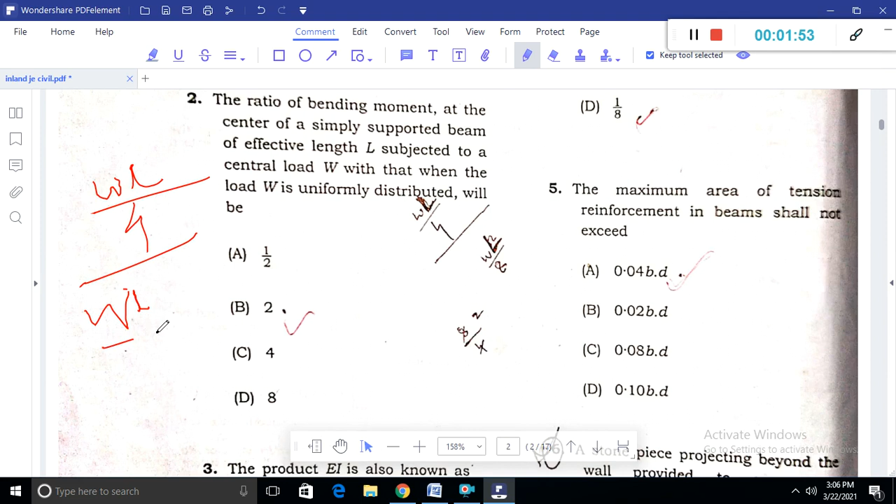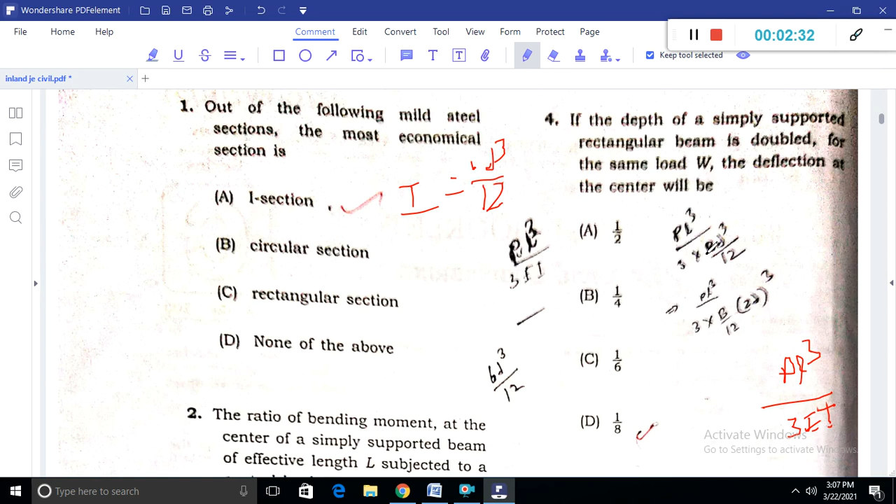If the depth of a simply supported rectangular beam is doubled for the same load, the deflection at the center is given as PL³/3EI. So we know it is inversely proportional to the modulus of elasticity and inversely proportional to the value of I, that is moment of inertia. For a rectangular section, moment of inertia is BD³/12. Here the D value is doubled, so it becomes 2D³, which gives 2³=8. So the final answer will be 1/8.

Next, the maximum area of tension reinforcement in the beam shall not exceed 4% of BD, that is 0.04 BD.

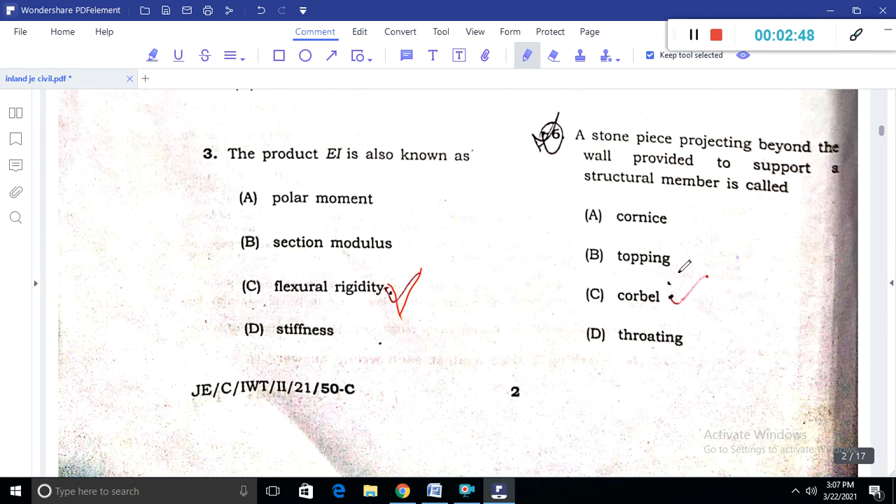A stone piece projecting beyond the wall provided to support a structural member is known as corbel.

Question number 7 asks, according to IS 456/2000, shear reinforcement is dependent on. Remember, shear reinforcement depends on the percentage of tension reinforcement and also on the grade of concrete. So options A and B are correct.

The diameter of longitudinal bars of the column should never be less than 12 mm.

That's an easy question. Next, as per IS 456/2000, the minimum grade of concrete to be used for RCC construction is M20.

Next, the ratio of Young's modulus of elasticity for steel to that of concrete is known as the modular ratio.

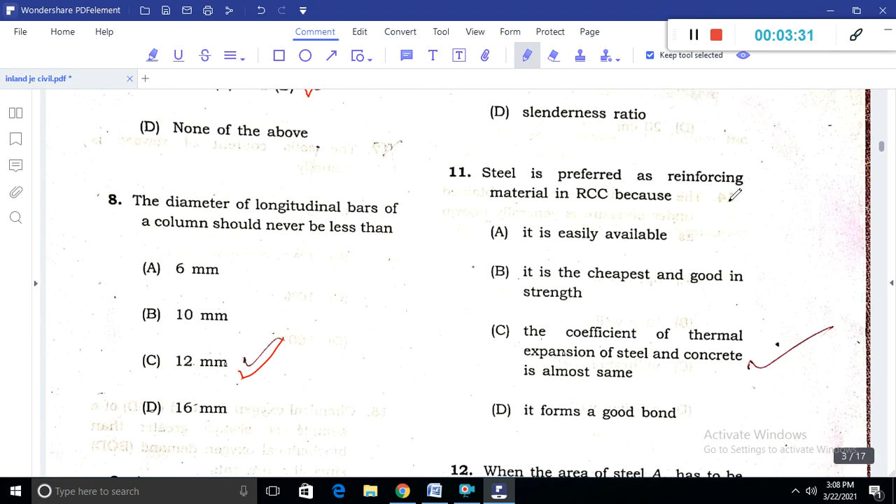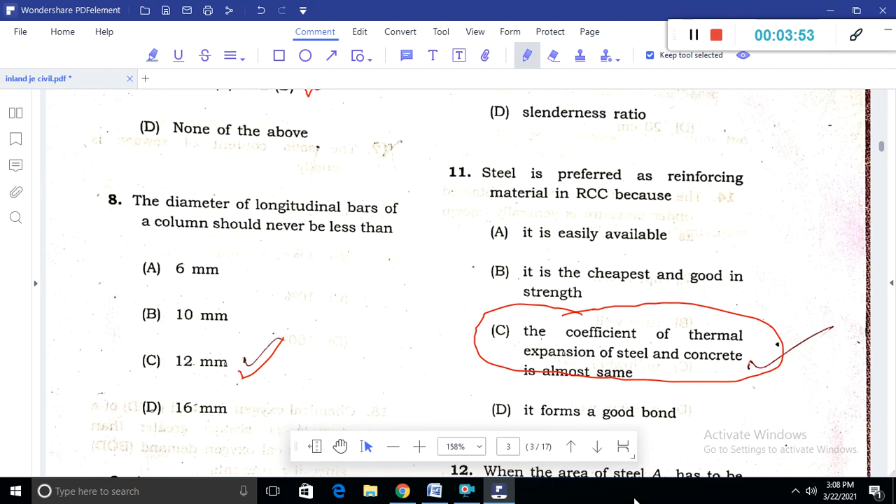So the same thermal expansion is the main reason we use steel. Question number 12 asks, when the area of steel AS has to be converted into the area of concrete, then the net increase in equivalent area will be AC minus MAS, where M is the modular ratio.

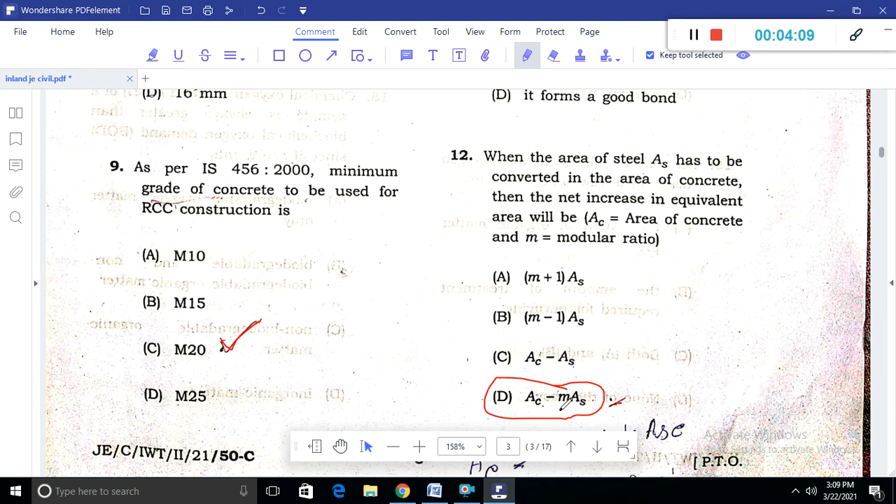Question number 13 asks, as per IS 456/2000 recommendation, the thickness of the footing edge on soil should not be less than 15 cm.

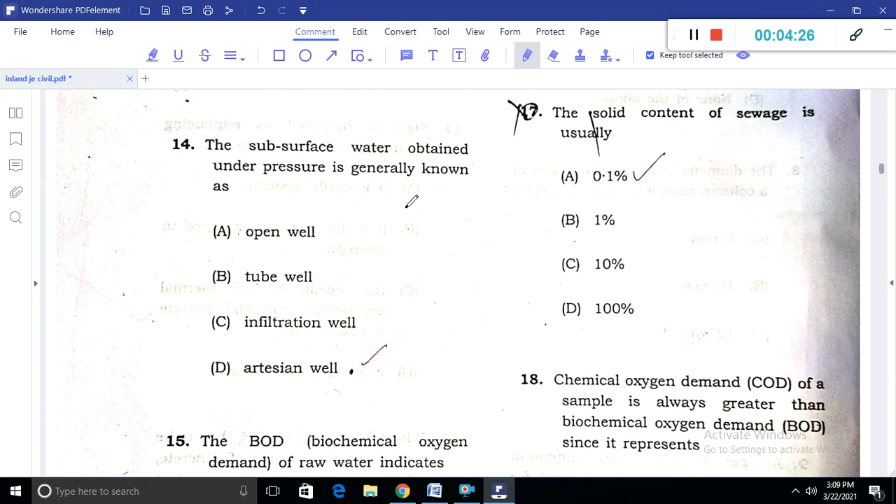Question number 14 asks, the subsurface water obtained under pressure is generally known as an artesian well. Then what is BOD? BOD is basically the extent of organic matter present, that is the amount of treatment required for purifying it.

Okay, so option C, both A and B, is the correct answer.

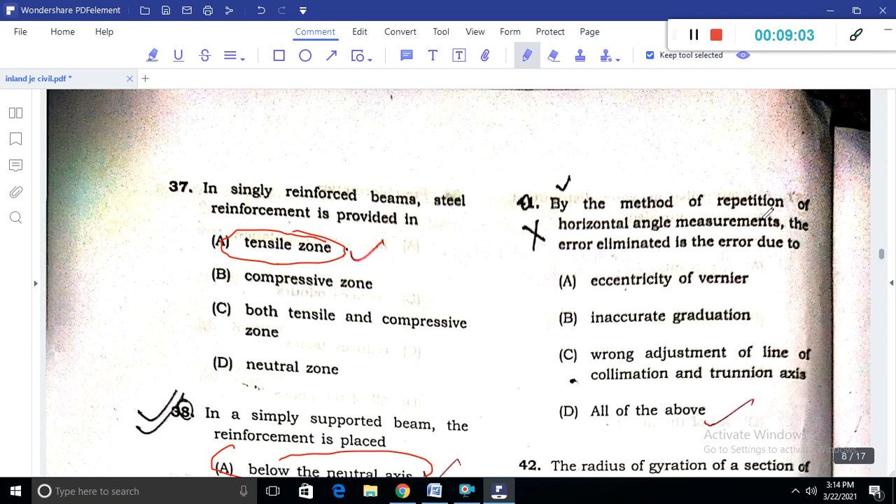Method of repetitions of horizontal angle measurement: the error it eliminates is the error due to, so mone rakhibo, eccentricity, eliminate kore inaccurate graduation, eliminate kore wrong adjustment of line of collimation and trunnion axis. Ihotor jetu trunnion axis or line of collimation or major jetu wrong adjustment hoy hetu eliminate kore, so option D is the correct answer.

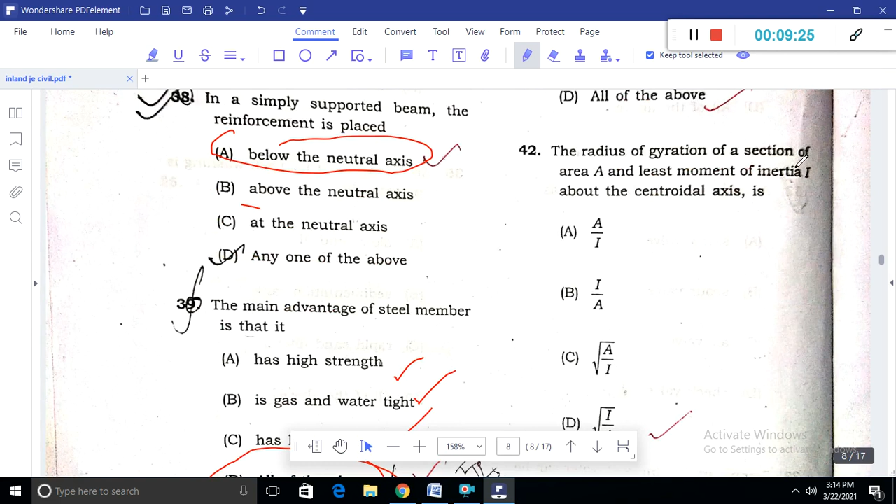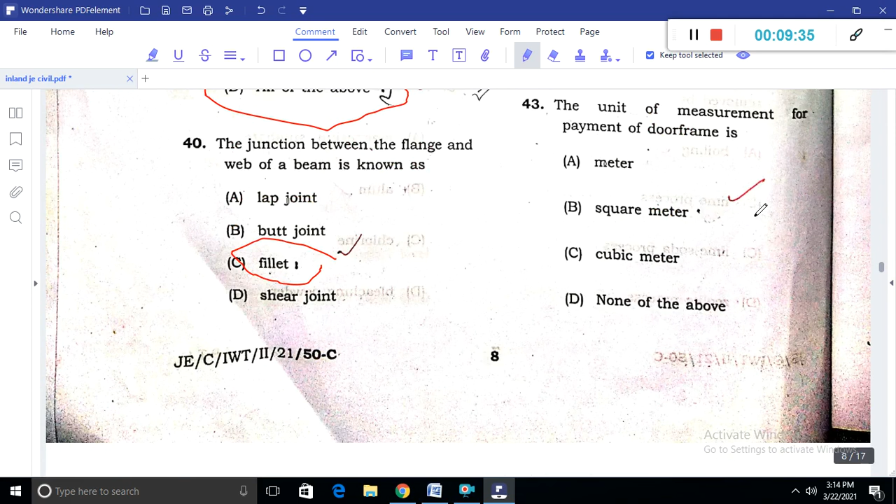Question number 42: the radius of gyration of a section of area A and the least moment of inertia I about the centroidal axis, or karone amar hoy jabo √(I/A). The unit of measurement for the payment of door frame, payment or karone amar measurement hobo square meter. Technical sanction means quantities of works, rates and cost. Then AAC, autoclaved aerated concrete block, jeto ami rasta banabole use koru ajikali.

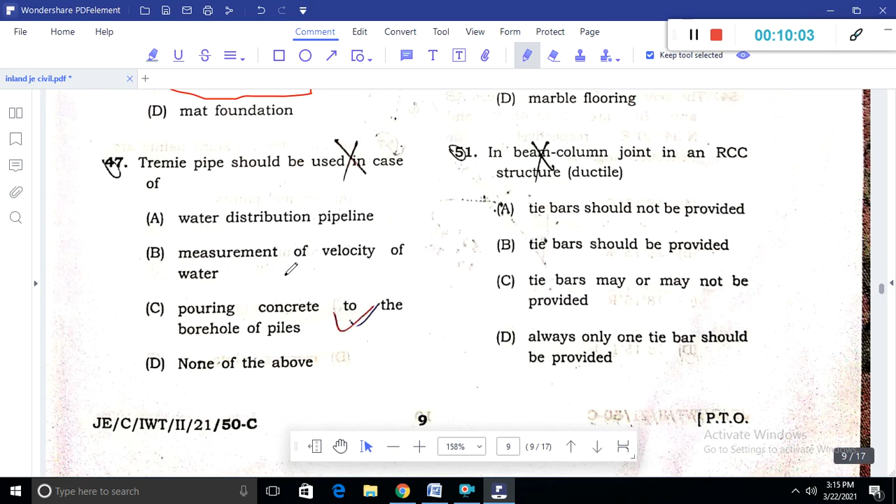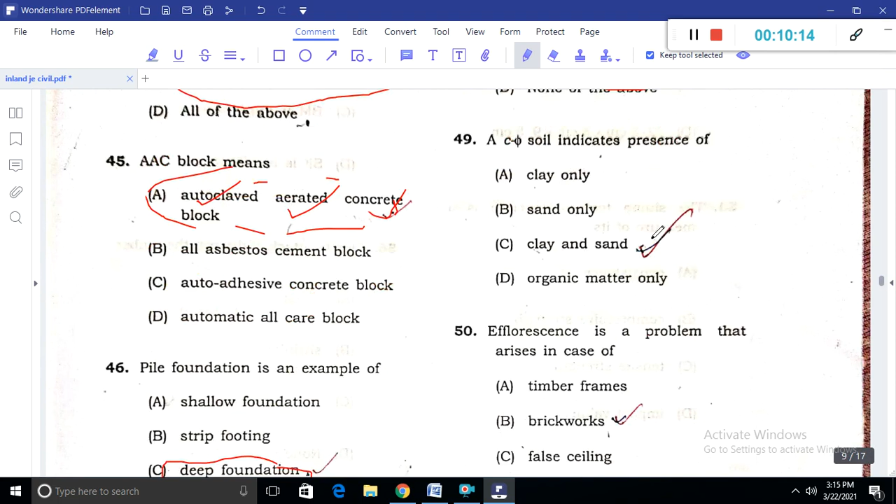Question number 46: pile foundation is an example of deep foundation. Tremie pipe should be used in case of, monorakibo, it is used for pouring concrete into the boreholes of the piles. Question number 48: pitot tube is used for measuring velocity of water. Question number 49: C basically our clay represent kore, so option C is the correct answer.

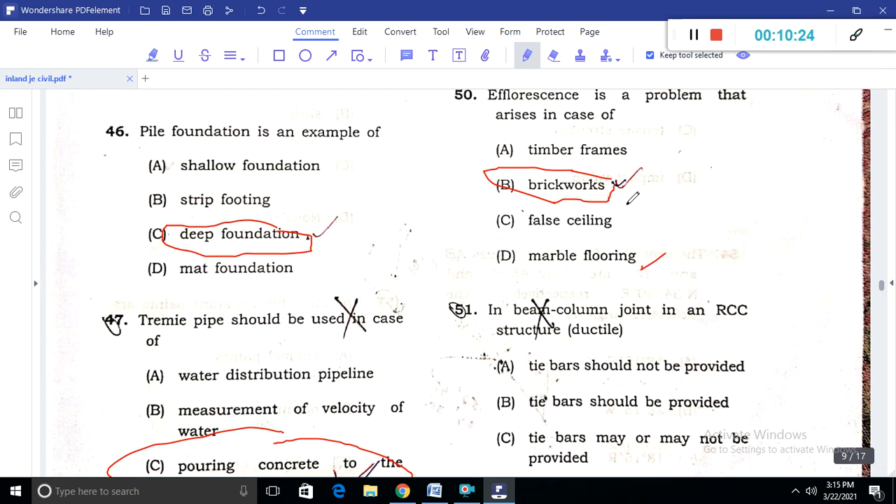Question 50: efflorescence is a problem that arises in case of brickwork, karone etu problem hoy efflorescence, jeti alkaline nature prabhabot pore brick black tete efflorescence hoy.

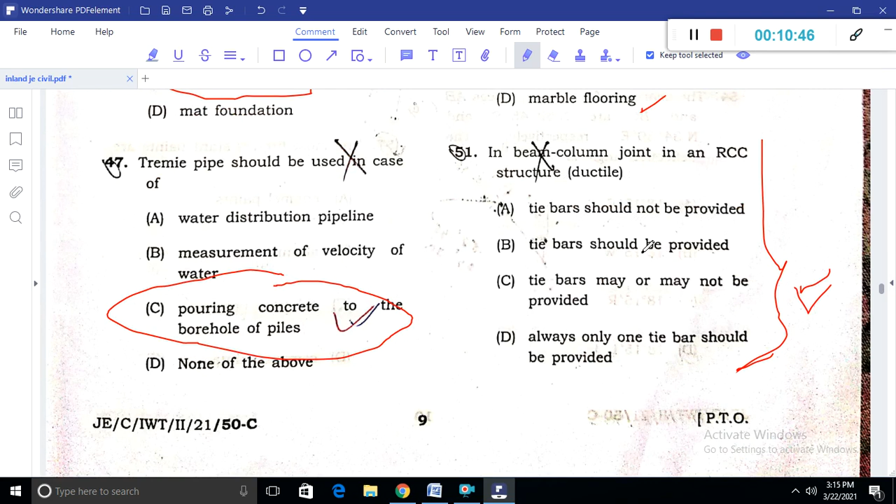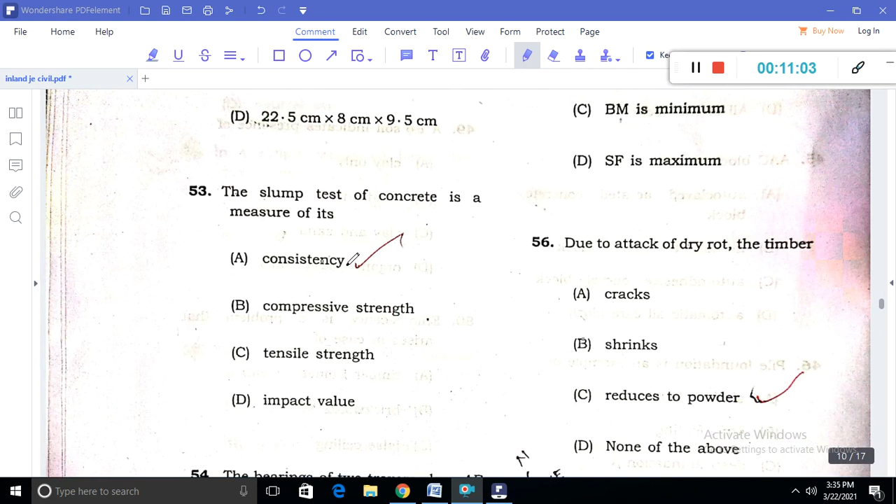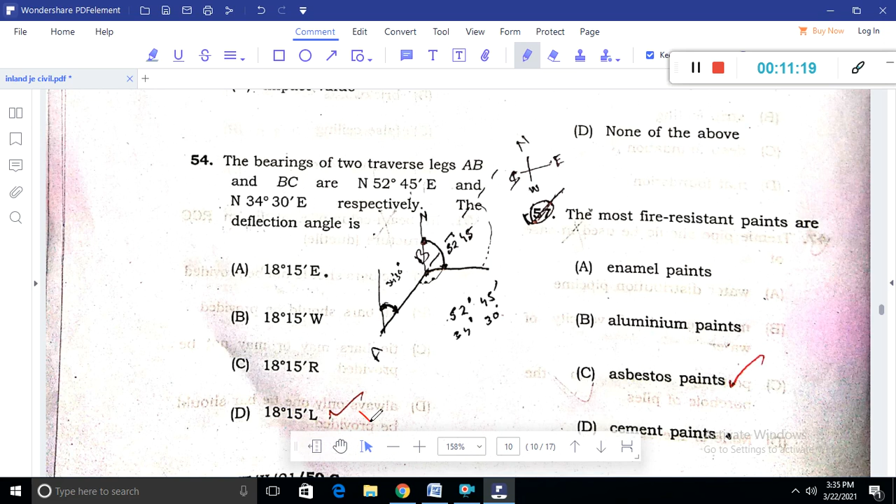Then question number 52: the actual size of modular brick is 19 x 9 x 9 centimeter. The slump test of concrete is a measure of consistency. The bearing of traverse legs AB and BC: amar deflection angle is nothing but the difference, deflection to left direction, so option D is the correct answer.

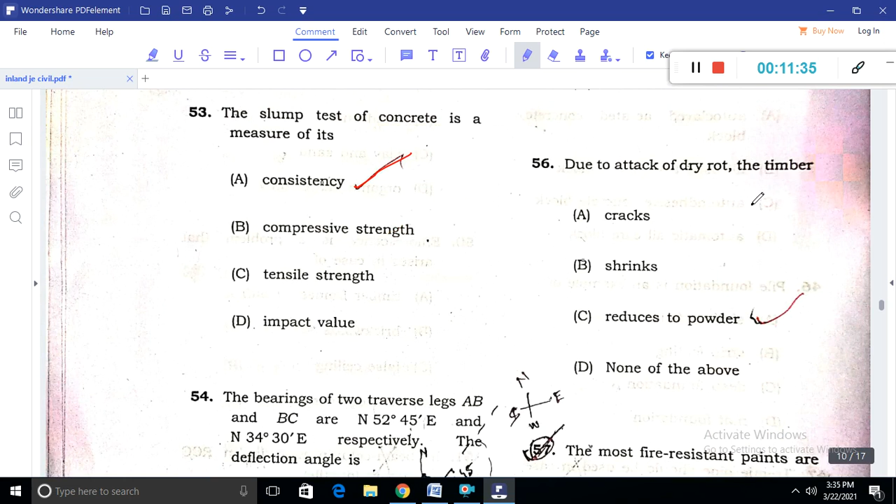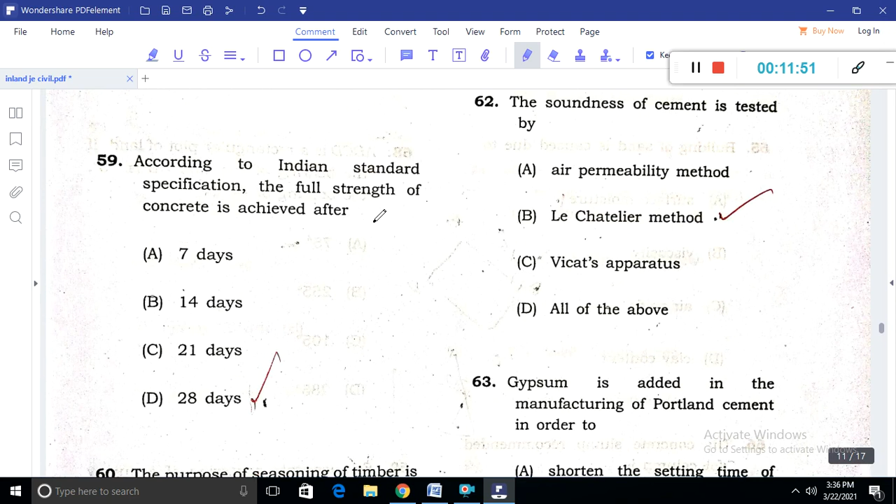Question 55: the point of contraflexure in SFD is the point where bending moment sign changes, tete point of contraflexure okara hoy. Due to attack of dry rot, the timber powder form ot gusi ahe. The most fire resistant paints amar hoy asbestos paints. Question number 58: the primary coat for structural steel work is red lead. Question 59: according to Indian standard specification, the full strength of concrete is achieved after 28 days.

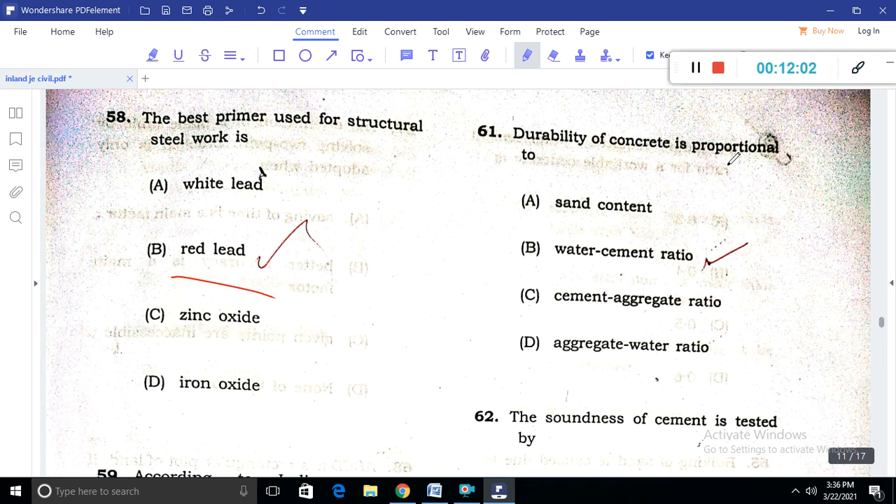The purpose of seasoning of timber is moisture content to kamai diye. Question number 61: the durability of concrete is proportional to water cement ratio. The soundness of cement is tested using Le Chatelier's method. Gypsum basically setting time bahai diye. Question number 64: the minimum required water cement ratio for workable concrete is 0.4. Bulking of sand is because of surface moisture. The concrete slump recommended for column is 75 or 125 mm.

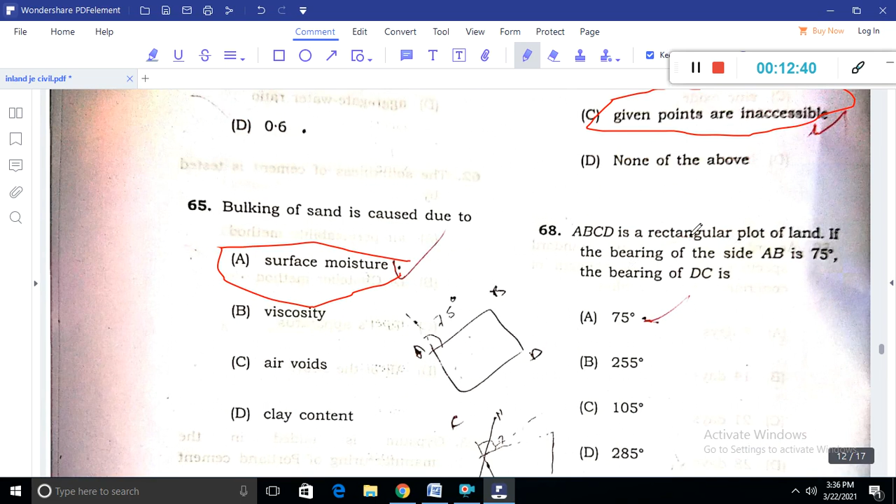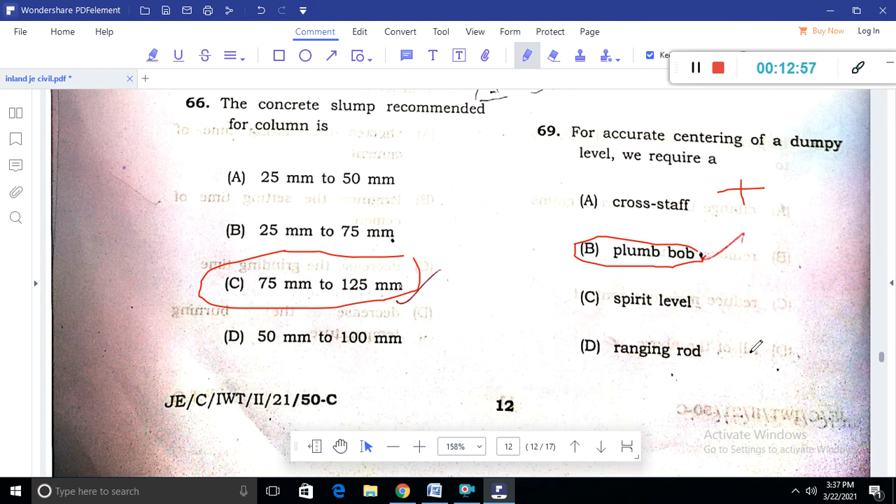The orientation of plane table by solving two-point problem is only adopted when the points are inaccessible. Jodi rectangular plot thake, jodi bearing AB 75 degree hoy, DC 75 degree hobo. For accurate centering of dumpy level ami plumb bob use koru. Cross staff is used for setting out offsets, spirit level for leveling purpose, ranging rod basically station point identify koribole. Question 70: the method of finding the difference in elevation between 2 points eliminating errors is reciprocal leveling.

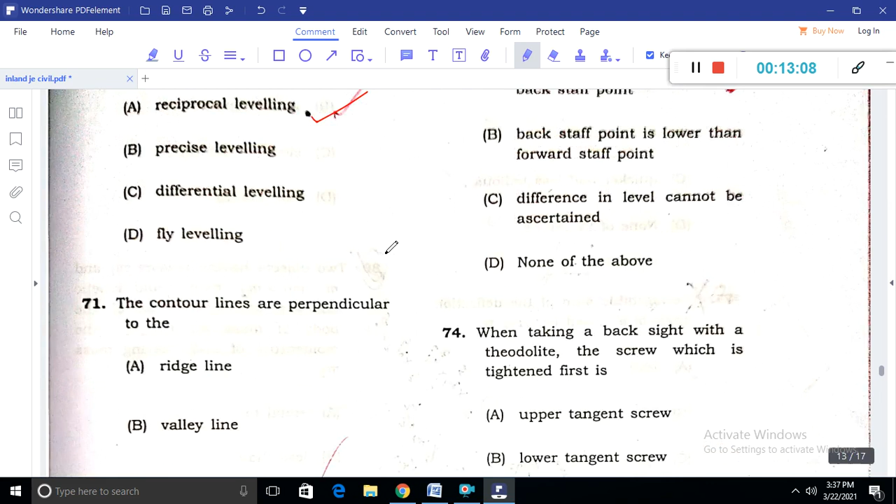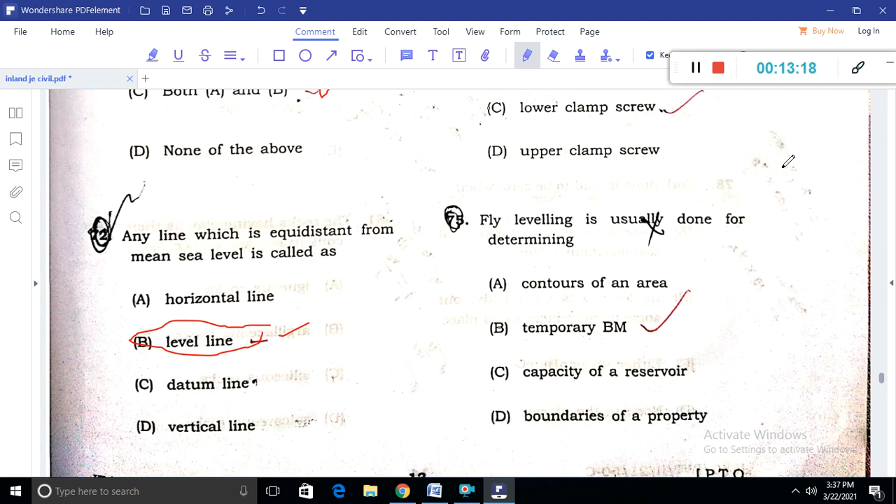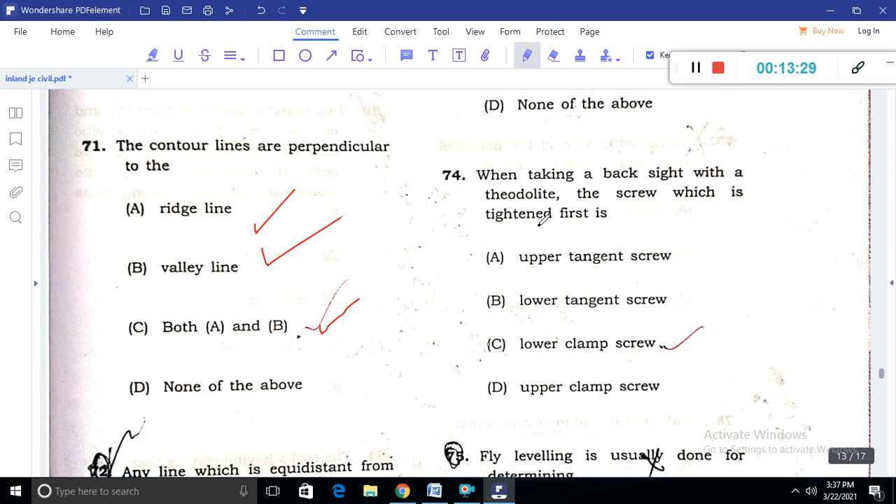The contour lines which are perpendicular to ridge line and valley line, so both A and B are correct. A line which is equidistant from the mean sea level is basically a level line. Question number 73: during leveling if the backsight is less than foresight, the foresight staff is lower than the backsight staff point. Question number 74: when taking a backsight with a theodolite, prothomote ame lower clamp screw khulibo lagibo. Question number 75: fly leveling is usually done for a temporary benchmark.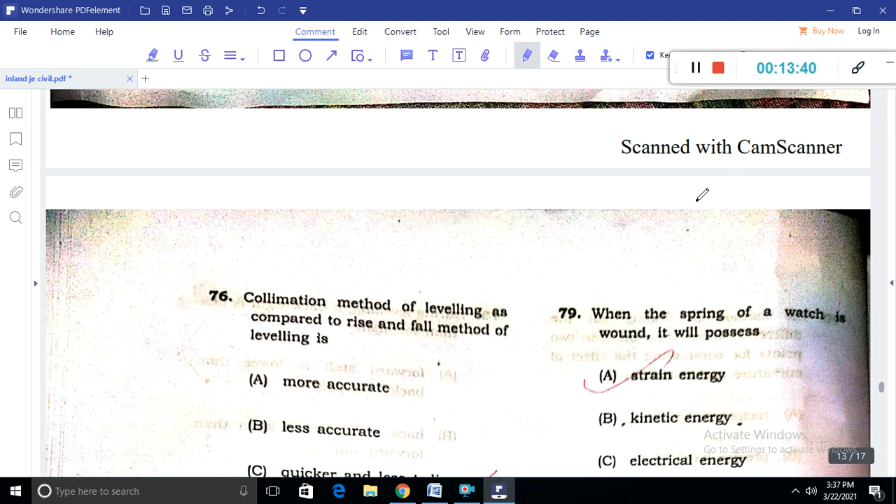Question number 76: the collimation method of leveling, as compared to the rise and fall method of leveling, is quicker and less tedious. The algebraic sum of deflection angles in a closed traverse is 360 degrees.

Question number 78: the work done is said to be zero when some force acts on the body but the displacement is zero, or no force acts on the body but some displacement takes place. So if either A or B happens, the work done is zero, because work done is nothing but force into displacement.

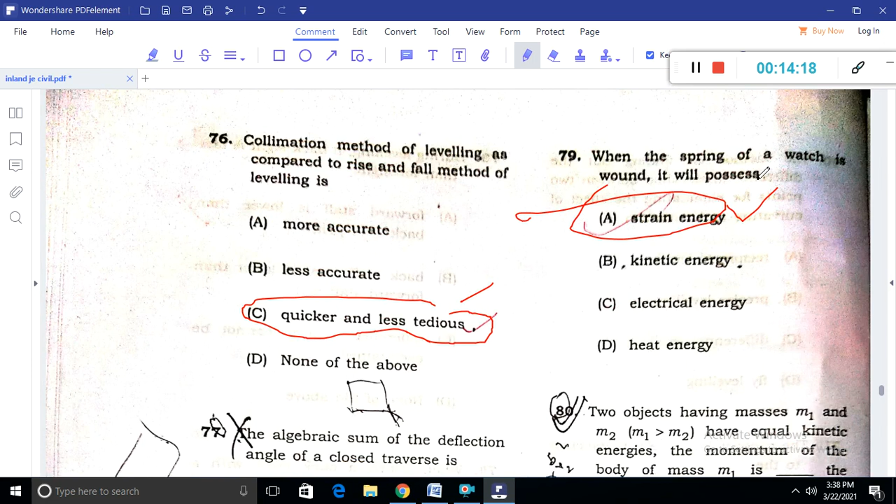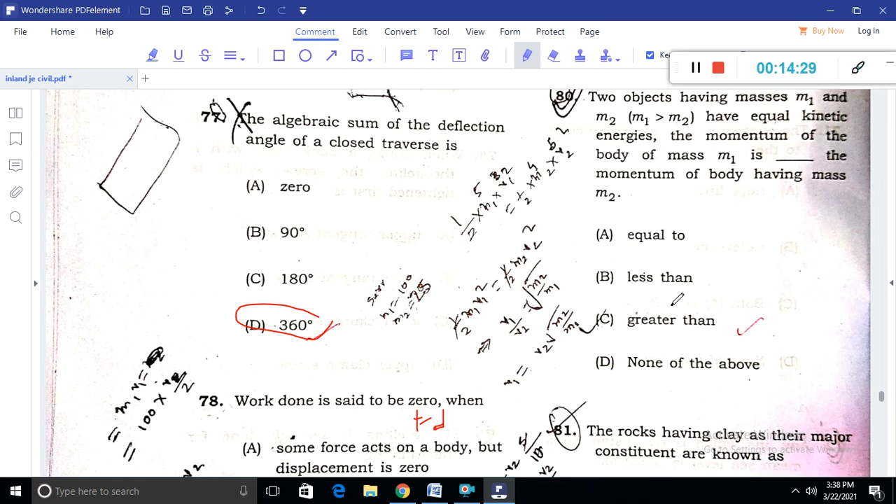Question number 80: if two masses m1 and m2 have equal kinetic energy, the momentum of the body of mass m1 is greater than the momentum of the body of mass m2. The rocks having clay as their major constituent are known as argillaceous rocks. Next, question 82: the portion of the brick left after removing a corner equal to half of the width and half of the length is a closure.

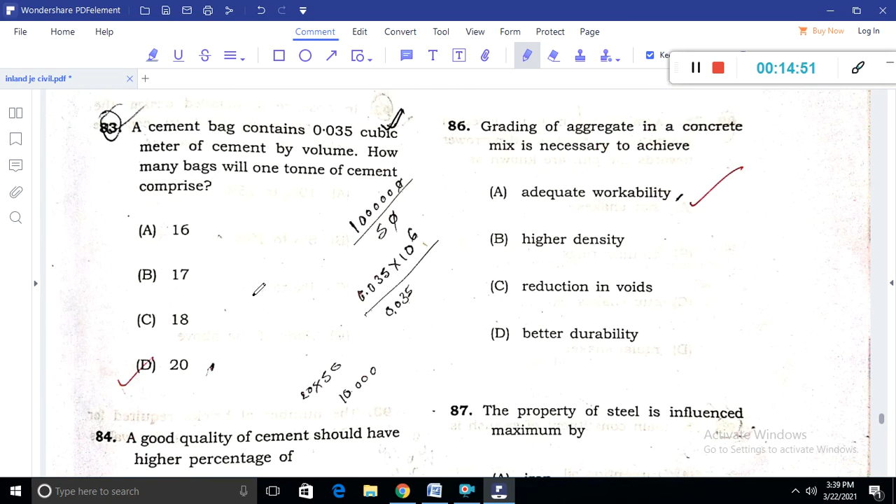Next, a cement bag contains 0.035 cubic meter of cement. How many bags are in 1 ton? 20.

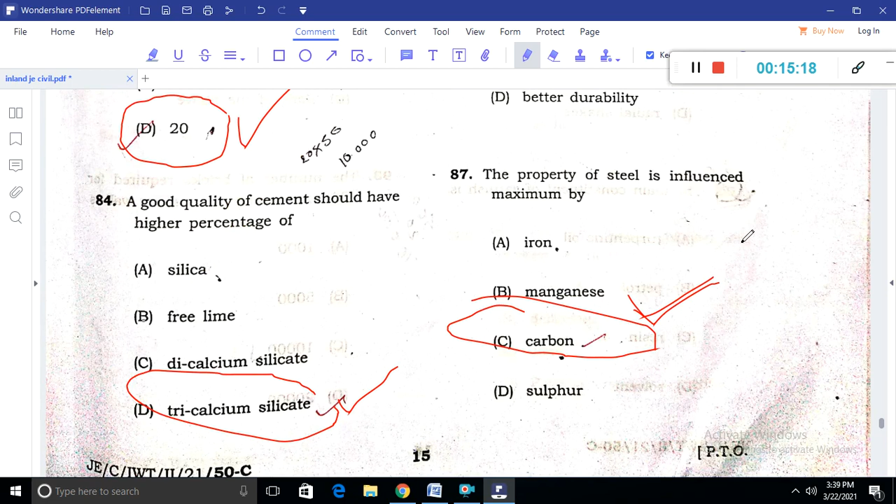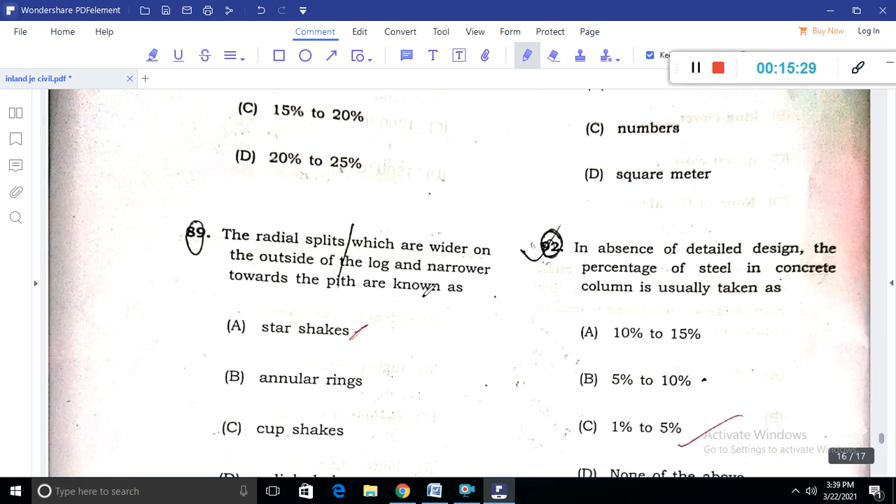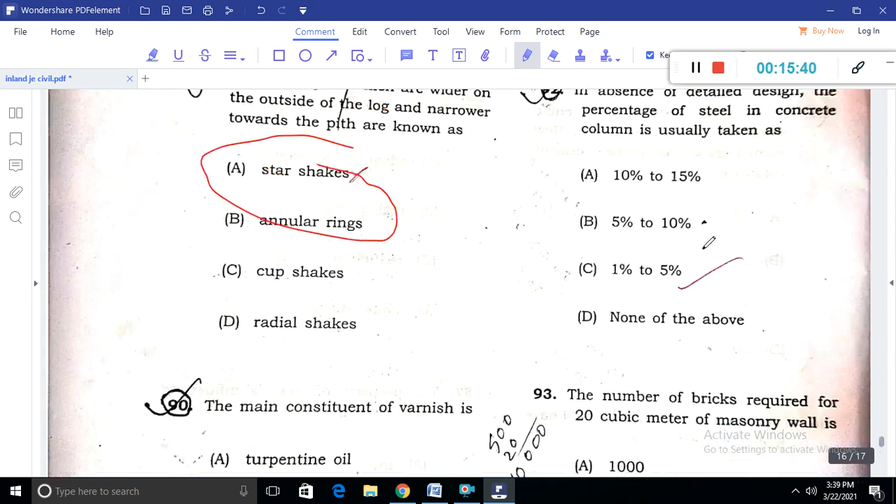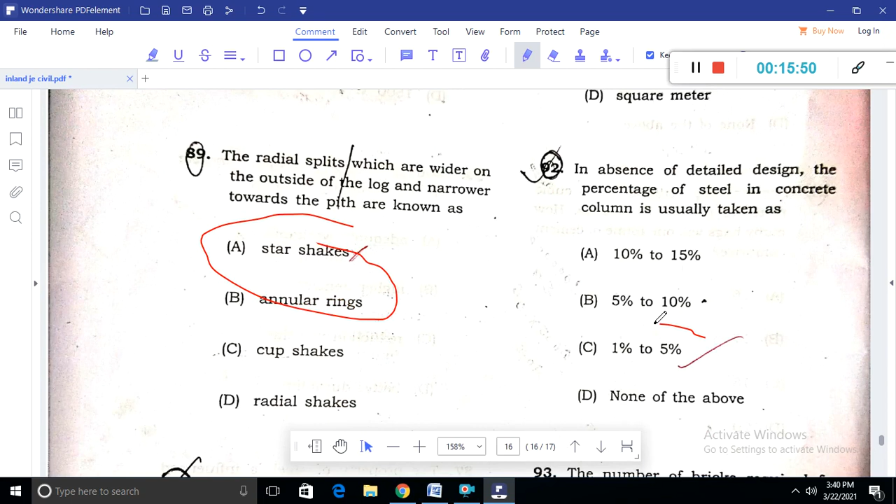Then question number 91: the unit of measurement for steel work in a truss when purchased is the quintal. In absence of detailed design, the percentage of steel in a concrete column is usually taken as 1 to 5%. Then 93: the number of bricks required for 20 cubic meters of masonry wall is 10,000.

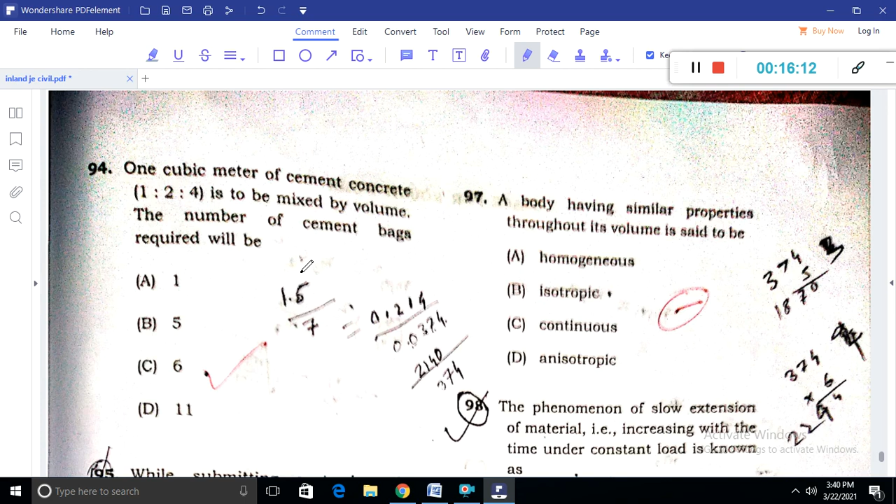6. Next, while submitting a tender, a contractor is required to deposit some amount with the department as a guarantee, so we call it a security deposit. If b is the width of the formation, d is the height of the embankment, and the side slope is s to 1, for a highway section with no transverse slope the area is bd plus sd square. Option B is the correct answer.

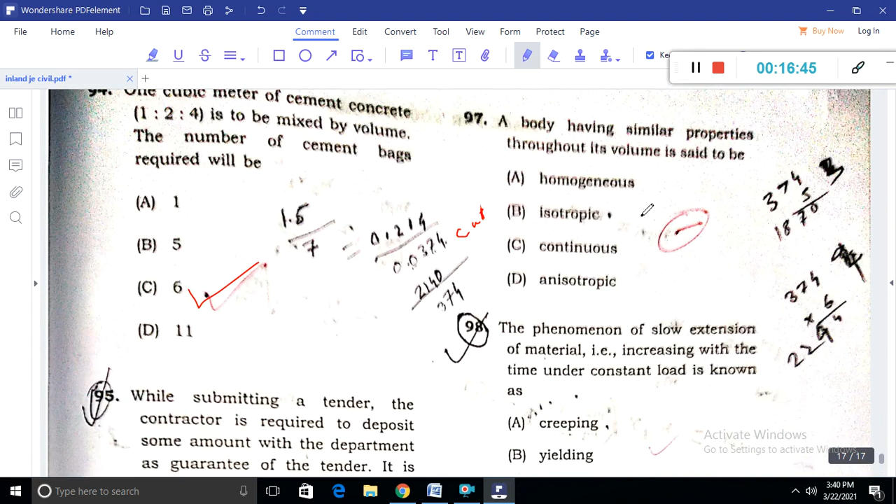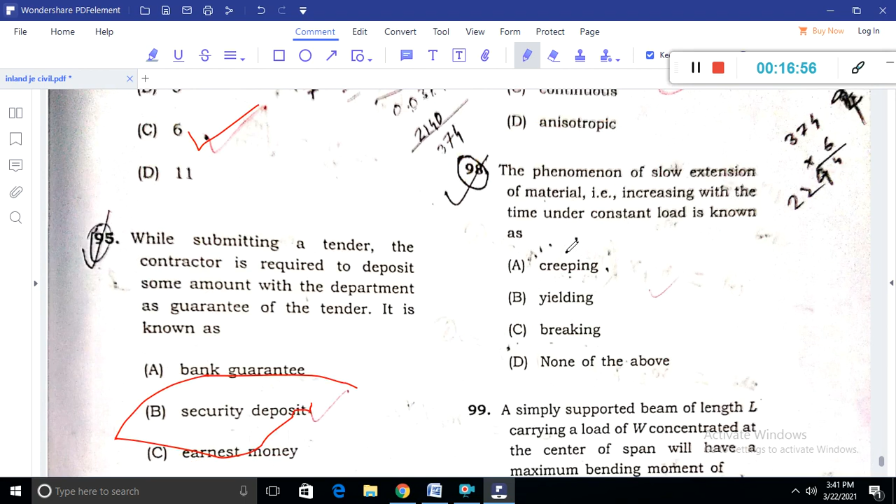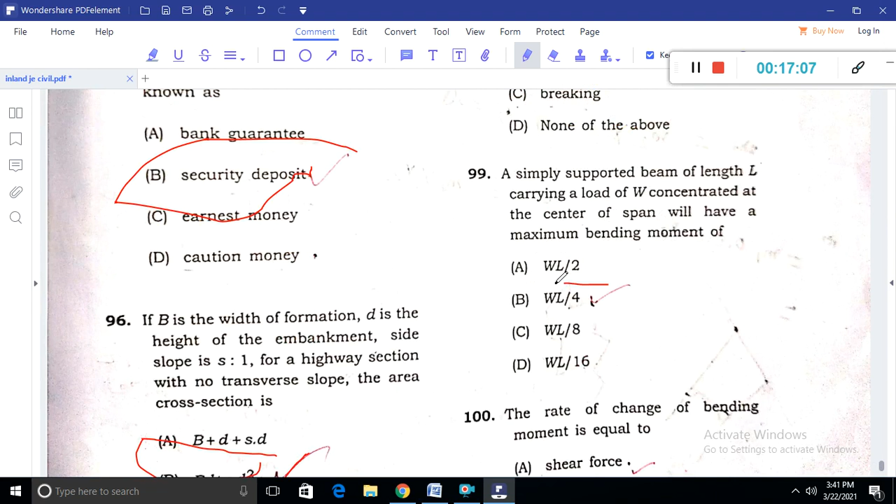Question number 97: a body having similar properties throughout its volume is called homogeneous. The phenomenon of slow extension of a material, increasing with time under constant load, is known as creeping. Question number 99: a simply supported beam of length L carrying load W concentrated at the center of the span will have a maximum bending moment of WL/4, since the load W acts at the center.

Next question: the rate of change of bending moment is equal to shear force. If we take dM/dx, we basically get the shear force.